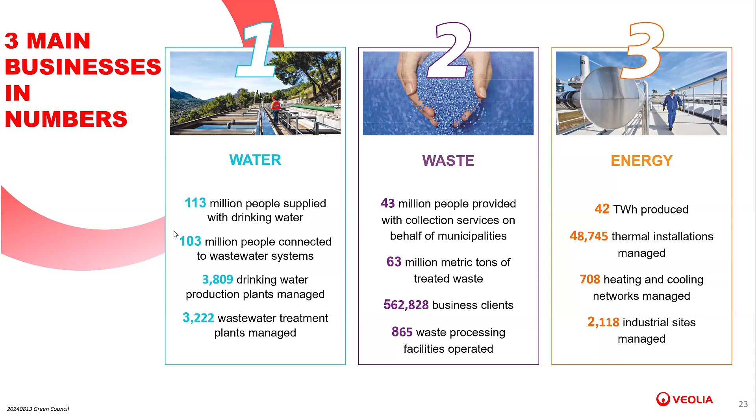So talking about Veolia Hong Kong and Macau, we have served Hong Kong since the 1990s. In 2024, Veolia Macau also joined Hong Kong, so we became the same group. Hong Kong has a very strategic position for Veolia because it also serves as our Asia Pacific headquarters. In 2024, Veolia Hong Kong and Macau has almost 2,500 employees. We have business in waste management and energy management, with over 20 significant projects in Hong Kong and Macau.

And Waylung, where I serve at this moment, is the waste collection arm for Veolia Hong Kong. We have traditional waste collection services like tanker and hazardous waste collection. We also have innovative services like smart bins for recyclables, food waste smart bins, and robots for desilting works. And in Macau, we have Ultra Clean and CSR, which also serve as the waste collection arm and provide cleaning and collection services for Macau.

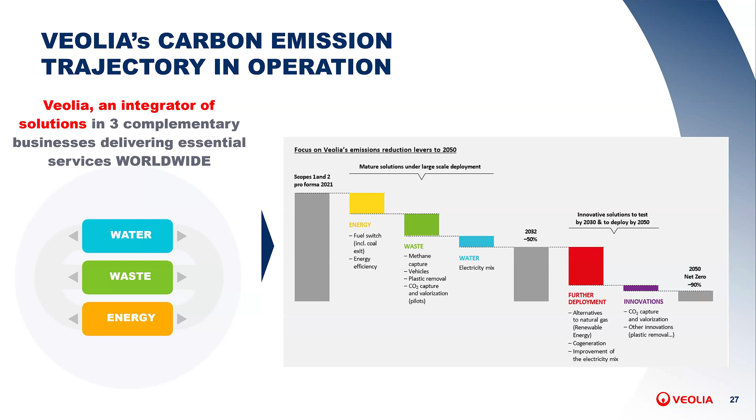So as for Hong Kong, I think it's not something new for everyone. Hong Kong commits to net zero by 2050 and commits to a 50% reduction of emissions. Not net zero, I mean carbon neutrality is different - reduce 50% of total carbon emission - and support all these measures with 240 billion Hong Kong dollars.

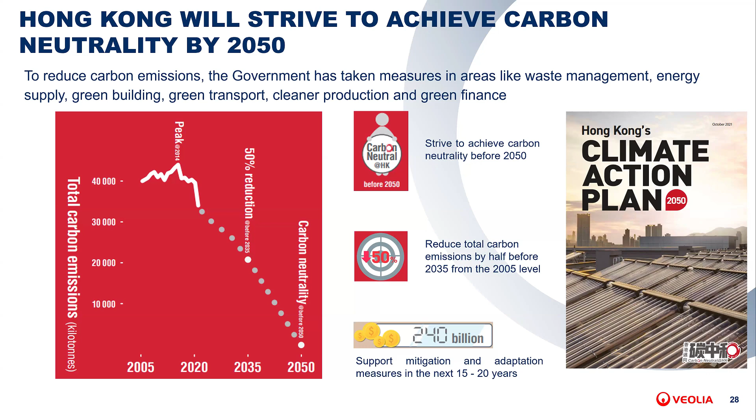So if we look at Hong Kong's greenhouse gas inventories, based on data from year 2021, we have 63% from electricity generation, 19% from transportation, and we also have to take into account 8% from waste. As Veolia manages all 3 landfills, we generate 2,600 kilotons of carbon dioxide equivalent in year 2021. So how we reduce all these emissions from our operations is, of course, Veolia Hong Kong's mission.

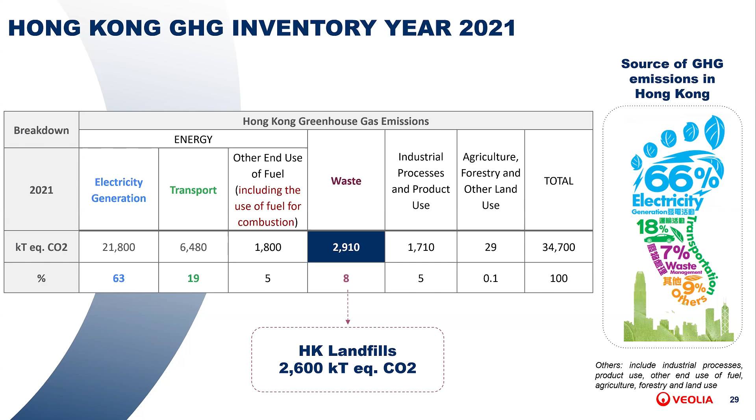And also we explore carbon capture solutions for incinerations. We have an incinerator in T Park, right?

For scope 2, we try to be self-sufficient for each plant. Like the chemical waste treatment plant, which has been operated since the 1990s - at the very beginning it didn't have this kind of self-sufficient system. So we are going to build a steam turbine for the chemical treatment plant and reduce our energy consumption from the grid.

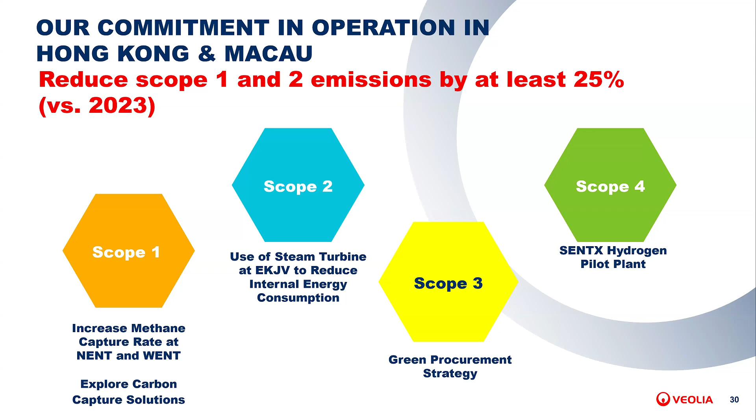For scope 3, we have this green procurement strategy globally, also adopted in Hong Kong and Macau. For scope 4, it's the hydrogen project, which I'm going to demonstrate afterward. So I'm going to briefly introduce scope 1 to 4.

For Veolia, our emissions consist of 3 parts. We have 73% from carbon dioxide, mainly from the combustion of fossil fuel, 26% from methane, mainly from landfills, and 1% from nitrous oxide, from the wastewater treatment process.

And also, for scope 1 and scope 3 - Veolia emits scope 1, which is direct emission from our landfills, because for landfills we have fugitive methane. Also scope 1, as everyone may be familiar, is direct emission from human activities like combustion of fuel waste. For scope 2, it's indirect emission from how we consume electricity - for example, our water treatment plants have very high electricity consumption, so they emit scope 2. And for scope 3, it's from the upstream and downstream of the value chain.

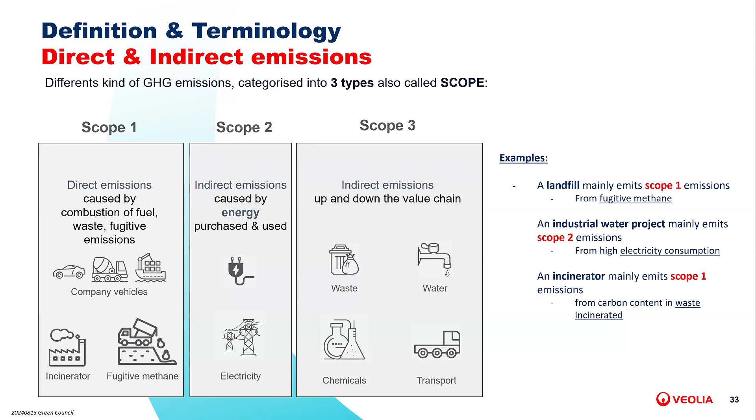But what I'm going to talk about here is scope 4. It's a new concept - the definition and terminology of scope 4 simply means emissions from our own services per se. It's not emitted by Veolia's clients, it's not emitted by Veolia's own activities. So as I mentioned before, our target is to increase scope 4, which means we have to avoid more emissions or reduce more emissions.

Avoided emissions means external greenhouse gas savings, like we recycle more materials, or we use renewable energy in our plants. Take T-Park as a reference - T-Park is a zero emission plant, a self-sufficient plant. So they have lots of solutions.

We have an on-site desalination plant to convert seawater to usable water, and we also use our own wastewater for flushing.

For T-Park, we also generate lots of heat. The surplus electricity from our non-hazardous waste incinerator is provided to CLP to reduce external greenhouse gas emissions. For WENT landfill, we also have surplus biogas, which we supply to CLP to generate electricity and provide to the grid eventually.

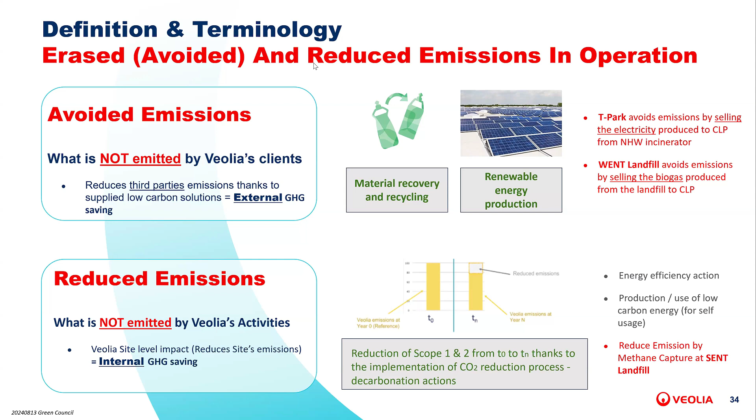For the last part, I'm going to introduce the biogas-to-hydrogen project at SENTX. We just signed an MOU with Towngas recently, and Towngas and Veolia will commit to hydrogen production, hydrogen transmission, and the hydrogen refueling station. Veolia already has a hydrogen plant in France, at a wastewater treatment plant, which produces 10 kilograms of hydrogen every single day. But for this plant, our designated capacity is 330 kilograms, which can provide power to 7 to 8 hydrogen buses for a full day's operation. The reason we developed this hydrogen project is, as mentioned, to increase the avoided Scope 4 emissions.

For landfills, there is lots of surplus biogas. We adopt many solutions to utilize our biogas, but we still have surplus. Previously, we would flare the biogas, which is wasteful and not helpful to the environment. So we tried to copy and adapt our hydrogen project from France to Hong Kong, to utilize the excess biogas for hydrogen production. This also supports the newly launched Hong Kong hydrogen strategy — the Hong Kong government has a task force for hydrogen and has given agreement to 14 projects. This SENTX hydrogen project is one of those 14 projects, and it also increases avoided emissions.

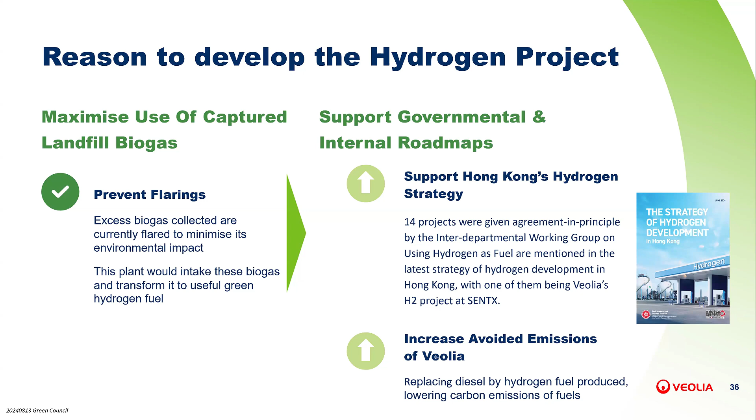For a brief introduction to the hydrogen value chain: there is grey hydrogen, from fossil fuel; blue hydrogen, from natural gas; and pink hydrogen, from nuclear. But Veolia's project is the very first green hydrogen among all these hydrogen projects, because we generate hydrogen from biogas, and the biogas comes from the decomposition process of organic waste. So it's absolutely green hydrogen.

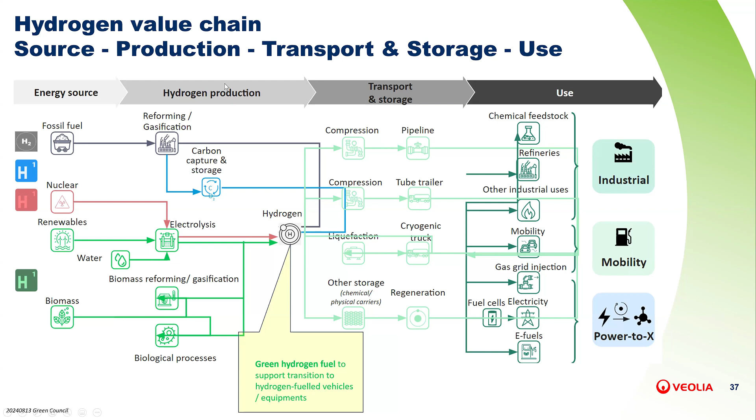Some background on SENT and SENTX: they are located in TKO. SENT has served Hong Kong since 1994. It started with municipal solid waste, but since the Hong Kong government developed TKO for residential buildings, at this moment SENT and SENTX only accept construction waste. We already adopt ammonia stripping for leachate treatment and have an on-site electricity generator — a genset on-site — and surplus biogas is supplied to town gas. This is our solution for SENT and SENTX to increase the utilization rate of our biogas.

For this hydrogen production plant, we adopt steam methane reforming technology, which is widely accepted in the United States and worldwide. First is pre-treatment, where we remove impurities from the biogas such as particulates, water, hydrogen sulfide, and siloxanes — these are some of the major impurities in biogas. Then in the production stage, we convert biogas, reacting it with steam with a catalyst to form carbon monoxide, which subsequently reacts with steam as well to generate very pure hydrogen. This is called the steam methane reforming and water gas shift process — that's how we produce the hydrogen.